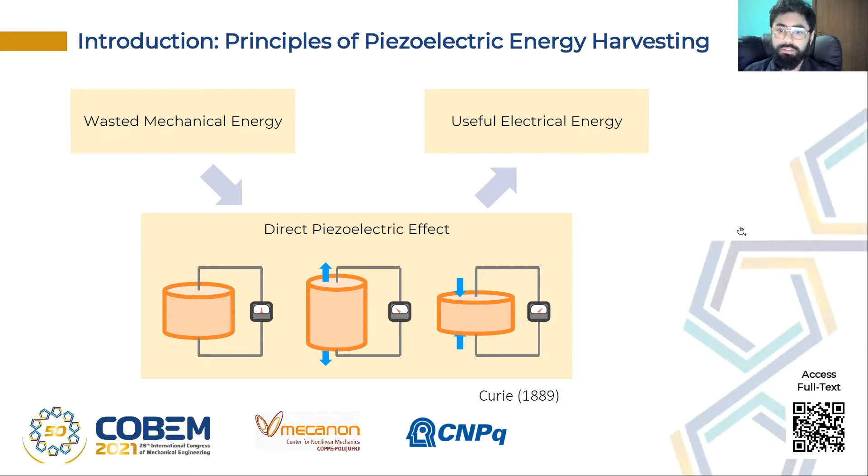So the principles of piezoelectric energy harvesting are very simple. Through the direct piezoelectric effect, you can harvest wasted mechanical energy and transform it into useful electrical energy. And of course, it has a vast gamma of applications, as in civil infrastructure, or in biomedical applications, or harvesting energy from impacts from rain to power electronic devices. For example, you can use the energy from human motion to power small electronic devices. And of course, offshore applications, as in those operations you have a lot of wasted vibration energy.

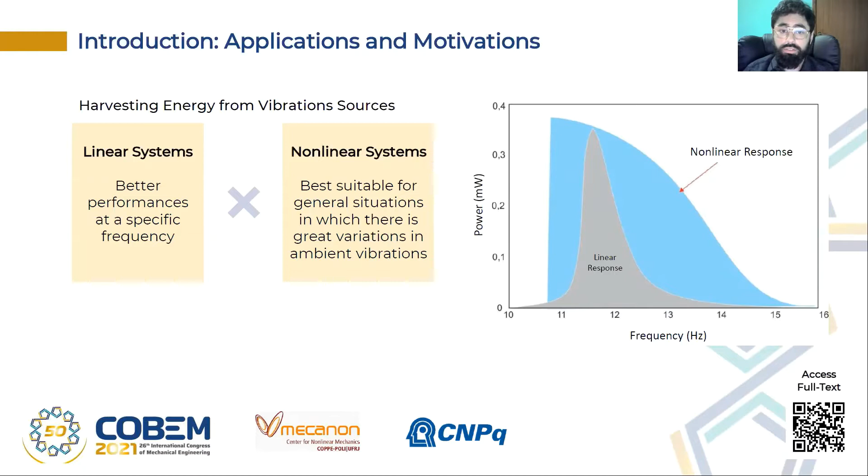So there are basically two types of energy harvesters. There are the linear systems that are better suited for specific applications where there's no variation of the operating frequency. And there are the nonlinear systems that are better suited for general situations where you have great variations in the ambient vibrations. This is the focus of our work, the nonlinear system, specifically the bistable systems with magnetic interactions that basically have two stable equilibrium points and can present chaotic responses.

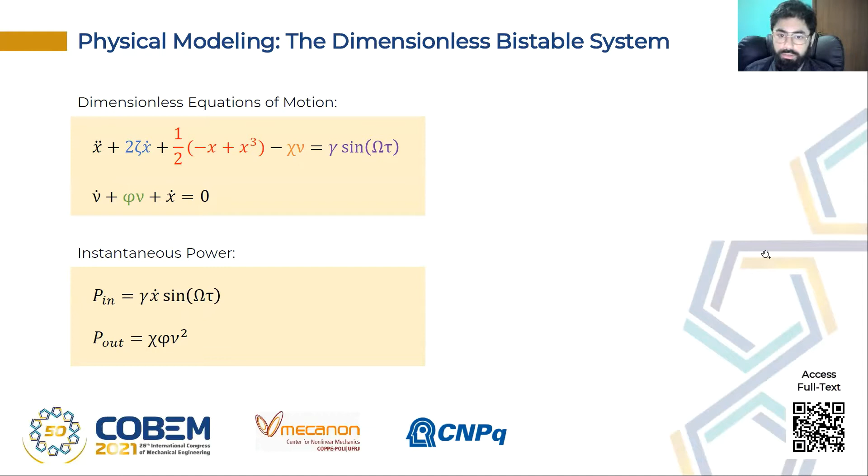So to evaluate the instantaneous power of the system, basically the input power is a mechanical power, as you can see, and the output power is an electrical power. So the input power comes from the vibration, and the output power is the energy converted by the piezoelectric element in the system. So to evaluate it in the time domain, over the full time in which the system is collecting energy, we use the root mean square measurement for the input power and the output power. And with those measurements, we can calculate the efficiency of the system.

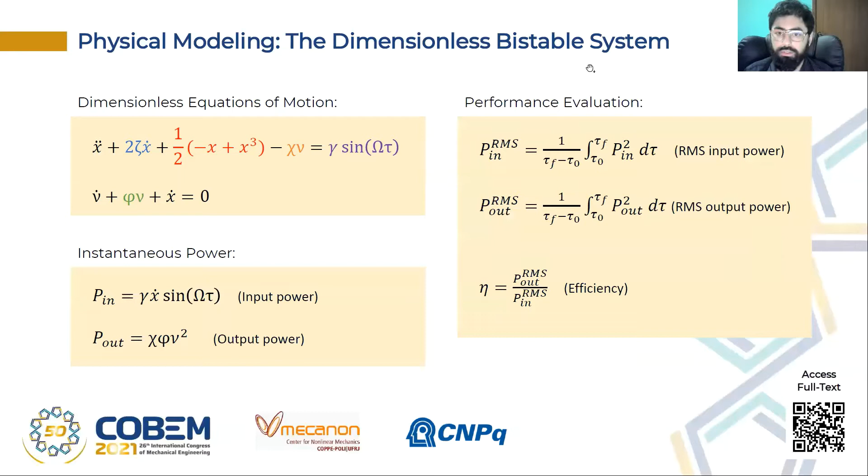So now let's do an overview of the system dynamics before we go deeply into the chaotic characteristics of those systems. So bistable systems exhibit two stable equilibrium points and one unstable equilibrium position at the center. It leads to three patterns of motion. Basically, the first one is the intra-well motion, as you can see here in black, where the system always oscillates around one stable equilibrium position. The second one is the full inter-well motion. Basically, it's when the system always oscillates around the two equilibrium positions.

And you have the third one that basically is the most complex one. It is a mix of the first one with the second one. At times, the system oscillates around one stable equilibrium position. At times, the system oscillates around the two equilibrium positions.

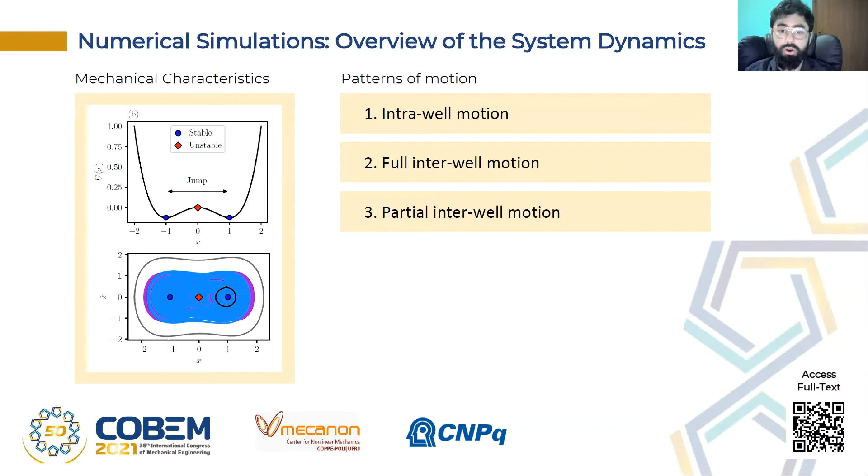So these kinds of motion are important because it greatly influences the performance of those systems. So in a previous work of ours, we had the necessity of creating a variable that quantifies these kinds of motion. So basically, we started to compare the quantity of jumps the system does, basically when the system jumps from one stable equilibrium position to another, and compare it to the maximum possible jumps the system can do in an interval of time.

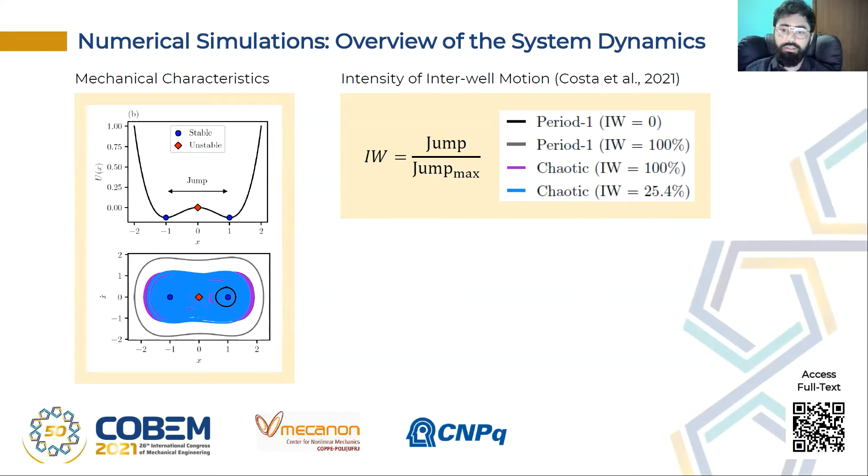And basically, for those cases shown here, the intra-well motion have the intensity of 0. A full inter-well motion here have an intensity of 100%, and though this chaotic blue here motion has the partial inter-well motion, basically that is a number between 0 and 100%.

So knowing that, let's consider the following parameters. In the following analysis, we will deal with 2 dissipation parameters and 3 forcing amplitude parameters, and the domain of external forcing frequency from 0.01 to 2. The initial conditions of all the simulations are based on the stable equilibrium position of the system.

The following methods also have been applied to the system of equations: the fourth order Runge-Kutta integrator, the Poincare maps, and Lyapunov exponents to map and identify chaotic responses to ensure that we are analyzing chaotic motion.

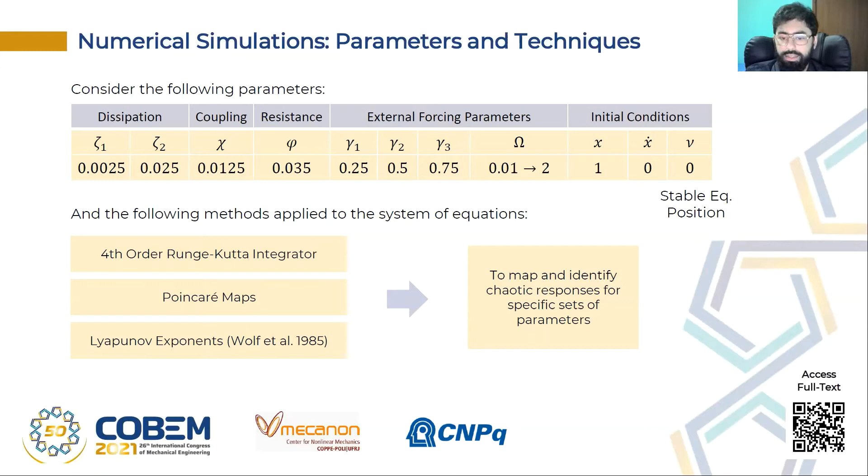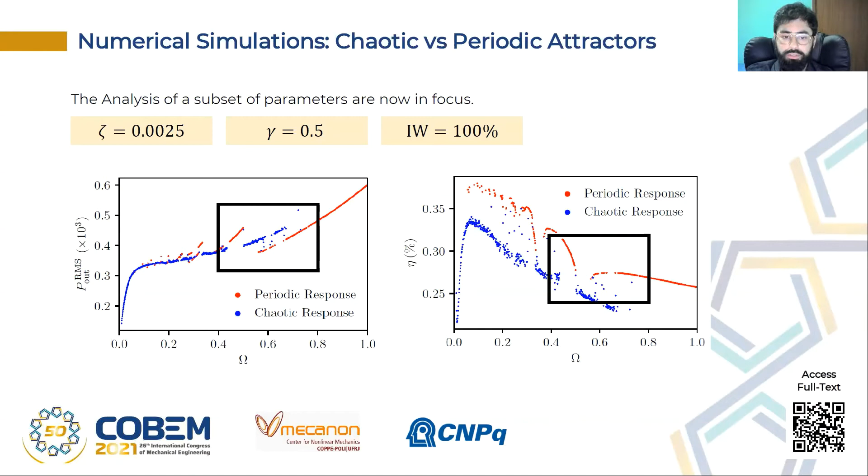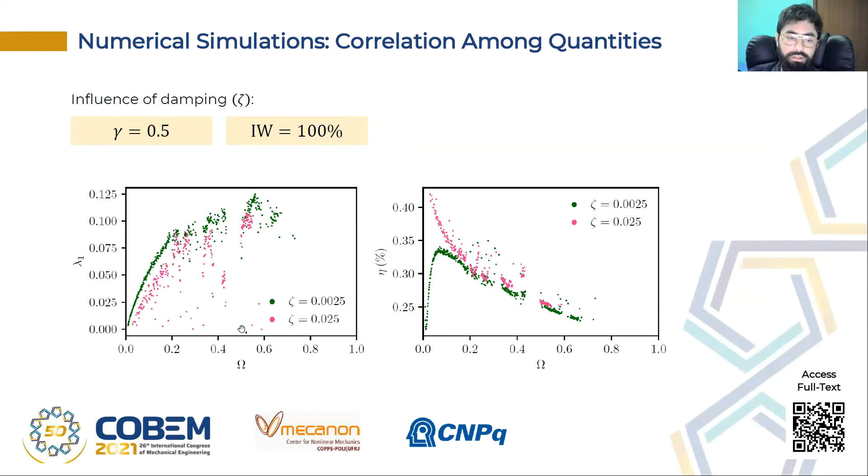Let's now talk about the influence of damping in those systems. So changing damping, increasing damping just increases the efficiency of the system in those initial excitation frequencies here, but in general, increasing the excitation frequency diminishes the efficiency of the system. Also, increasing damping decreases the value for the largest Lyapunov exponent in all excitation frequencies.

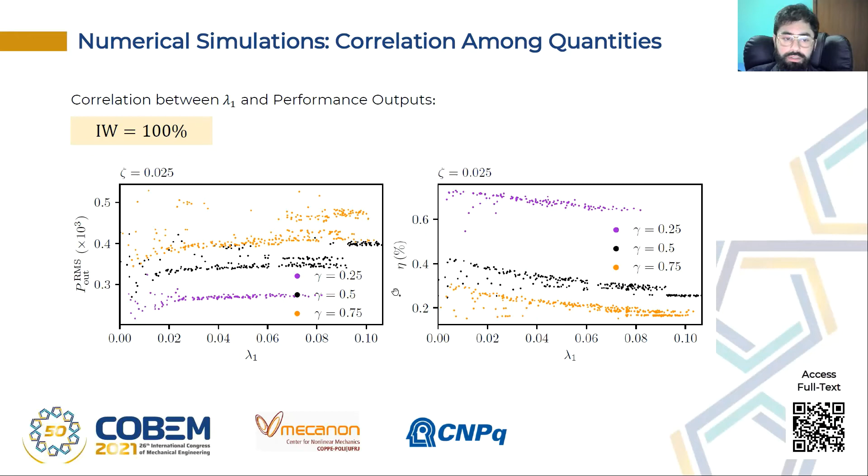Now let's analyze the correlation between the largest Lyapunov exponents and the performance outputs of the system as output power and efficiency. Looking at these 2 graphs here, there's a clear nonlinear relationship between the largest Lyapunov exponents and the output power and the efficiency. But something strange happens when we increase the damping, and these correlations seem to be less concise than before. We don't know yet why this is happening, but we are going to address this in future works.

So the conclusions: our principal objective was to map and identify chaotic attractors for a different set of parameters and point the benefits of chaotic motions in bistable energy harvesting systems. The general analysis shows the need to distinguish different patterns of interwell motion, as it greatly influences the output power of the system.

The general complex behavior led to choose only cases where the intensity was 100%, proceed with the analysis, and the correlation analysis shows a clear relationship between the electrical output parameters and the lambda 1, that is the largest Lyapunov exponent. Changes in damping change this correlation pattern, and the destruction of patterns indicates a possible influence of other variables in these correlations.

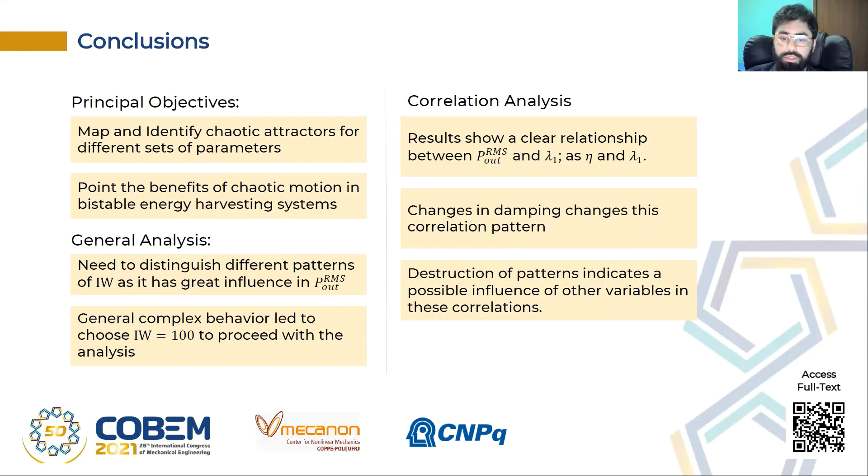So future work, we need to do a deeper investigation considering other variables in the correlation between lambda 1 and output power. And we need to do the analysis considering other values of the intensity of interwell motion. And of course, we need to do experimental verification.